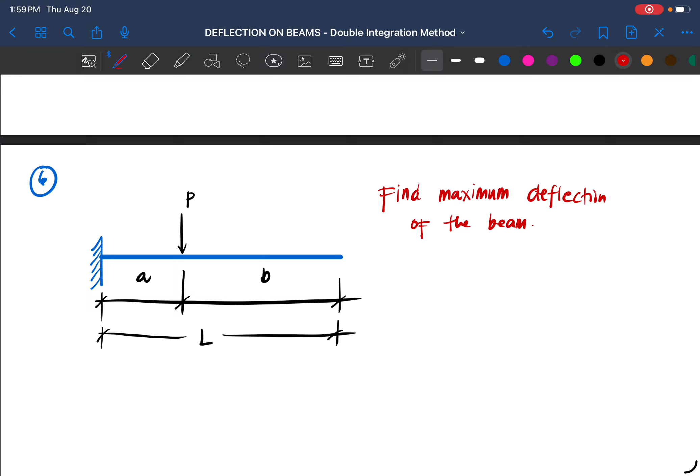Okay, for our next example, paano naman kapagka yung beam nyo ay cantilever na? Cantilever beam and at the same time wala kayong specific values for our load P. Ang distances nyo ay in terms of A and B and then L. Ang pinapahanap sa inyo ay yung maximum deflection of the beam.

Obviously, this is a cantilever beam, so ang magiging elastic curve nyo ay pag ganito. Mag-start kayo doon sa may fixed end support nyo, and then magkakaroon yan dito ng deflection sa dulo. Tandaan nyo na palagi kapag ang beam nyo ay cantilever, yung maximum deflection nyo ay laging nasa dulo. Ito yung inyong maximum deflection or Ymax. Okay, so pinapasolve sa atin yung maximum deflection in terms of these letters lang.

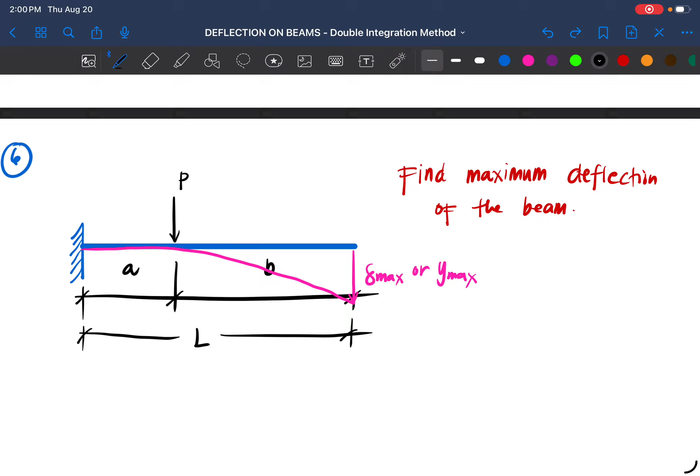Walang binigay na specific values for them. So let's try. Ganun pa rin, first, inanalyze natin yung beam nyo. Next, dinrawingan natin siya ng elastic curve. Ang third ay pwede natin actually kunin yung support dito.

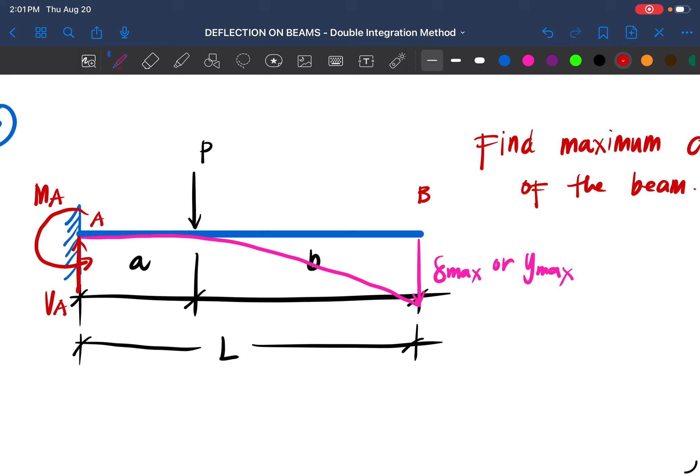Let's call this as your A and this is your B. Pwede natin sa totoo lang kunin yung VA dyan at saka yung moment A. Pwede natin kunin yan kasi this is a cantilever beam, so statically determinate yan.

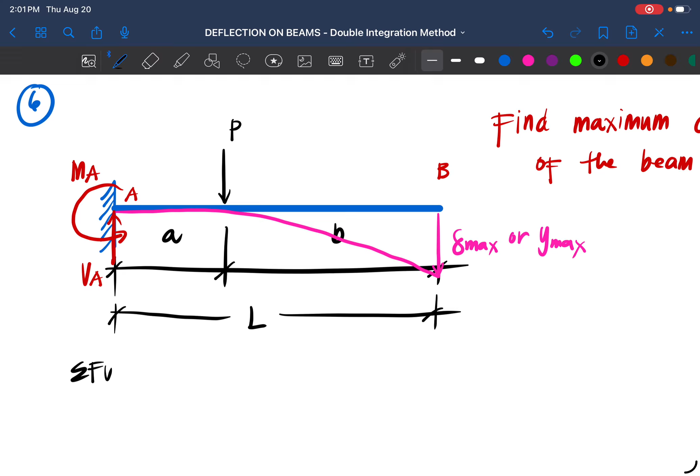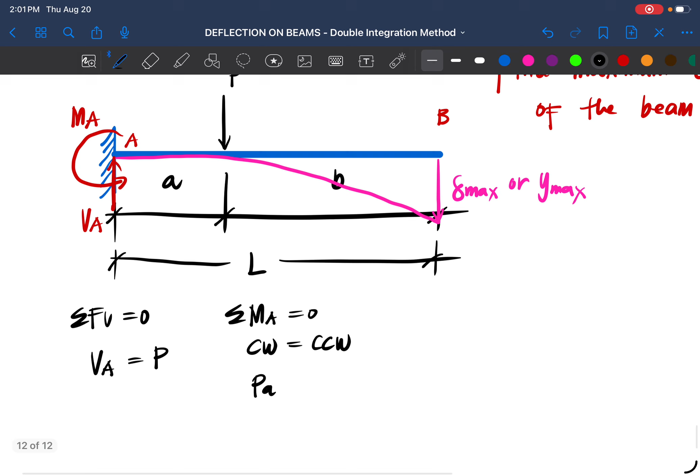So kapag nag-summation ng forces, vertical is equal to 0, so VA is equal to P. Yun na. And then, taking summation ng moment at A is equal to 0, clockwise equate that to counterclockwise moments. So that's going to be PA, P times A. Ano pa? Wala na, that is equal to MA. So therefore, MA is equal to PA, and then VA is equal to P. So ayan.

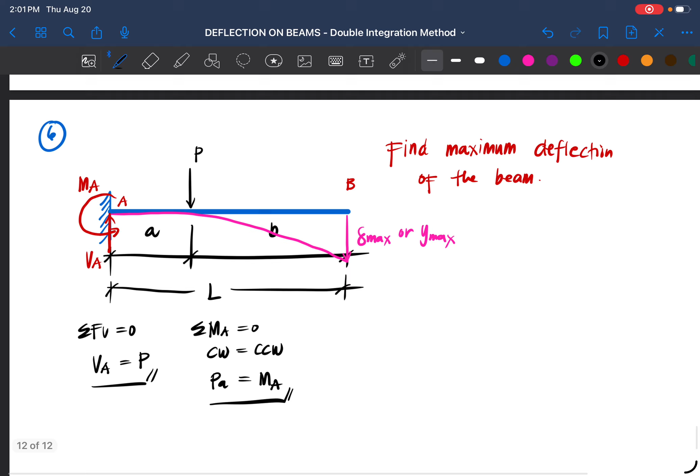Next, mag-draw tayo ng imaginary distance x. Okay, since kailangan natin i-include yung MA at saka yung PA na yan, yung VA at saka MA na yan, dito tayo mag-cut. Mag-draw ng imaginary distance x. Well, pwede rin naman sa kabila, pero pwede nyo i-try. Pero ako, dito ko siya idodrawingan ng imaginary distance x. Para ma-include yung MA at saka yung VA na yan.

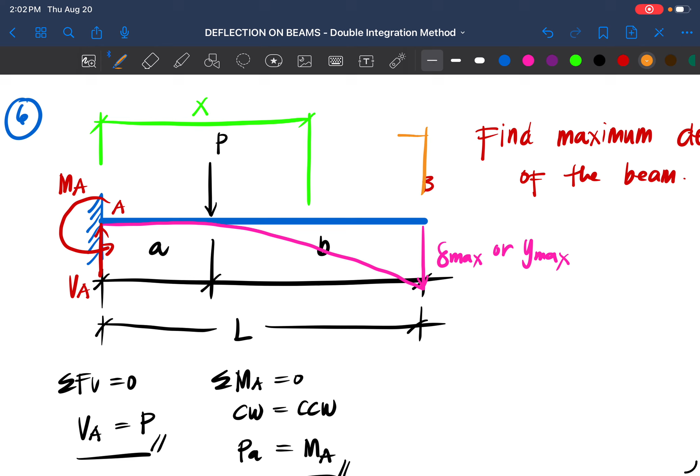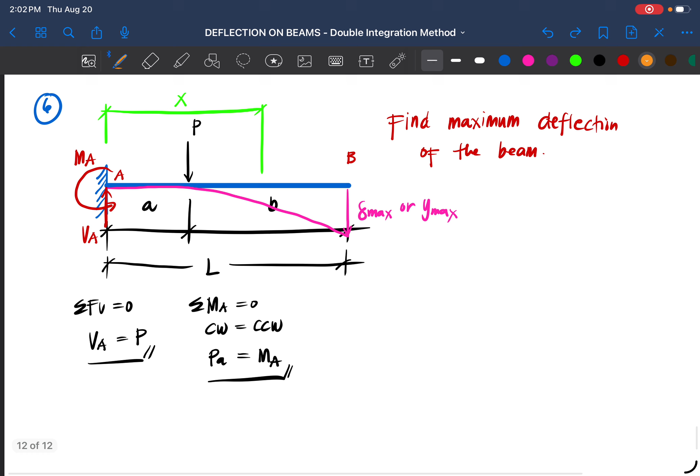Pero baka may magtanong, pwede dito? Yes, pwede yan. Ang mangyayari lang, yung magiging deflection nyo, instead of in terms of A, magiging in terms of B siya. Which, pwede naman. Pwede nyong i-try. Okay, na-analyze, na-drawingan ng elastic curve.

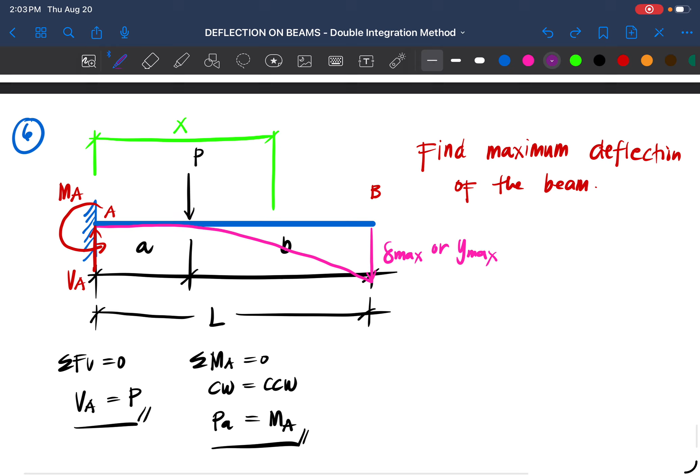Next, na-drawingan na natin siya ng imaginary distance x. This time, mag-solve na tayo or mag-moment na tayo. This is your mx or moment sa distance x. So, this will be EI y double prime is equal to mx.

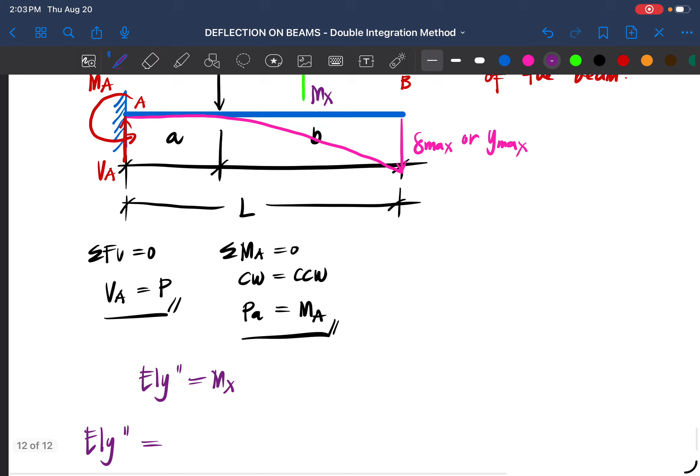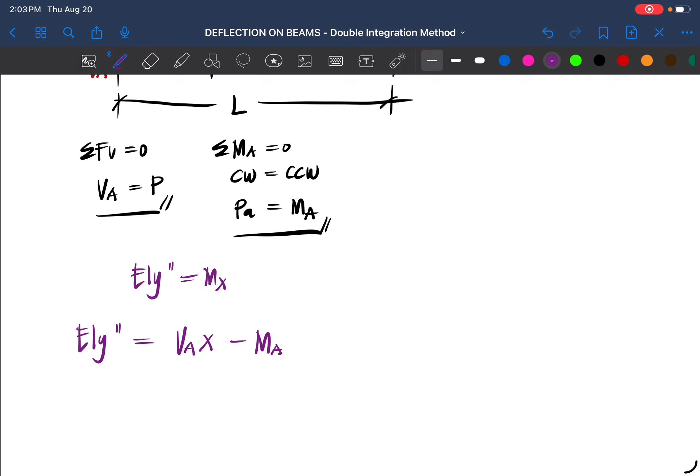This will now be EI y double prime is equal to, ano ba yung mx niya dyan? Upward forces minus downward forces. So yung upward VA yan is going to be V sub A X. Ano pa? Minus MA. Yung MA nyo, lagyan nyo siya ng X raised to 0. And then, ano pa? Yung P nyo, therefore, ang distance dito ay X minus A. Minus P times yung moment arm niya, that's X minus A. Okay, recheck natin, mabuti. That's V sub A X minus MA X raised to 0 minus P times quantity X minus A.

And then ito, yung V sub A nyo tsaka M sub A nyo, palitan nyo yan ng in terms of P. Ito yun. So ito, magiging P na lang to. And then ito, magiging PA. This will now be EI y double prime is equal to, this is PX minus PA x raised to 0 minus P times quantity x minus a. Ayun na.

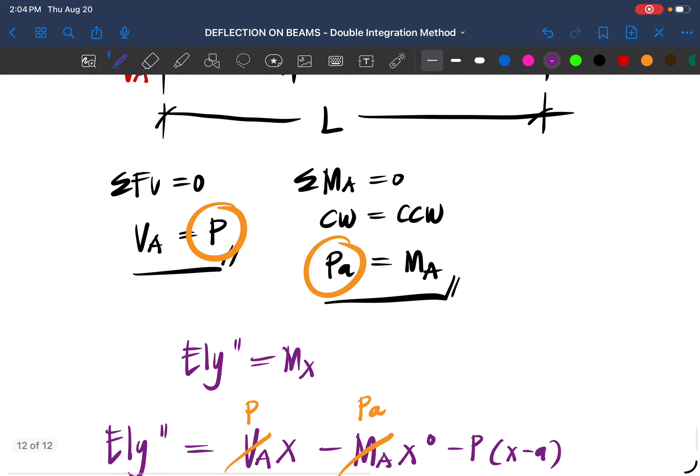Okay. Para check natin. M. Okay. Na-analyze, na-drawingan nyo yung elastic curve, na-drawingan nyo yung imaginary distance x, na-establish nyo yung moment equation nyo.

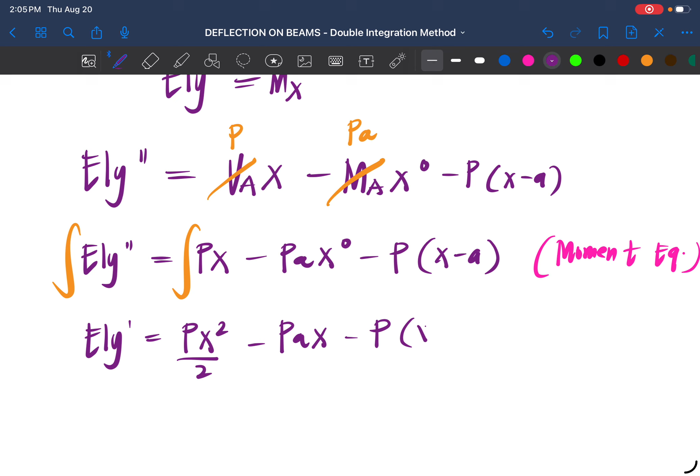This time, we can now integrate. This is your moment equation. Let's now integrate this, both sides. This will now be EI y prime is equal to PX squared over 2 minus PAX minus P times quantity X minus A squared over 2 plus C sub 1.

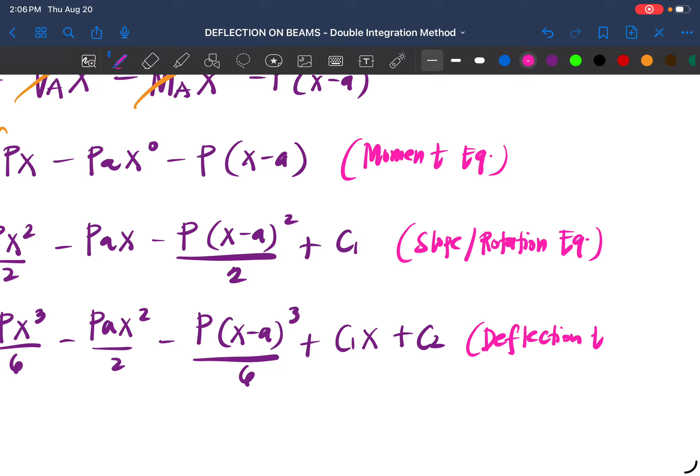Integrating once more, this will be EIY is equal to PX cubed over 6 minus PAX squared over 2 minus P times quantity X minus A cubed over 6 plus C sub 1 X plus C sub 2. We can now call this as your slope or rotation equation, and we can now call this as your deflection equation.

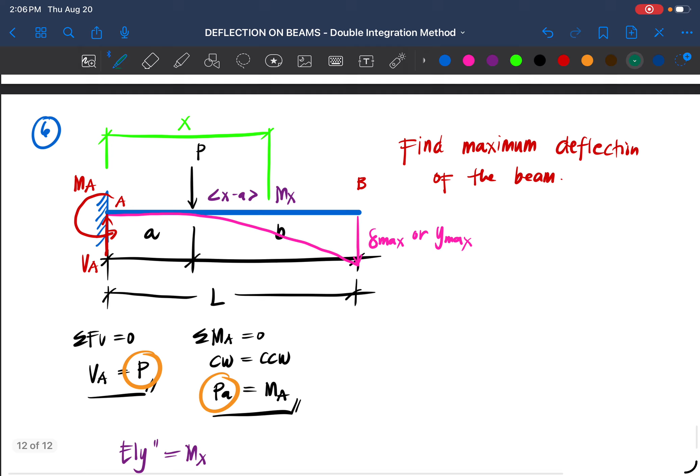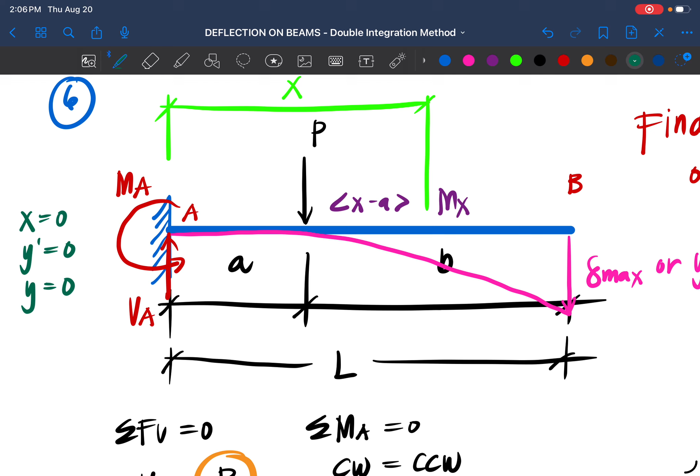Ayan. Okay, next, ano kayang next boundary conditions? Kapag ka binalikan niyo yung boundary conditions dyan, since dito tayo nag-start mag-draw ng imaginary distance x at x is equal to 0, walang rotation dyan kasi fixed yan. Wala ring deflection dyan. Y is also equal to 0. Yan na. Dyan lang. Wala naman tayong ibang support. So yan lang ang boundary condition nyo.

So, kunin natin to. Copy. Paste natin.

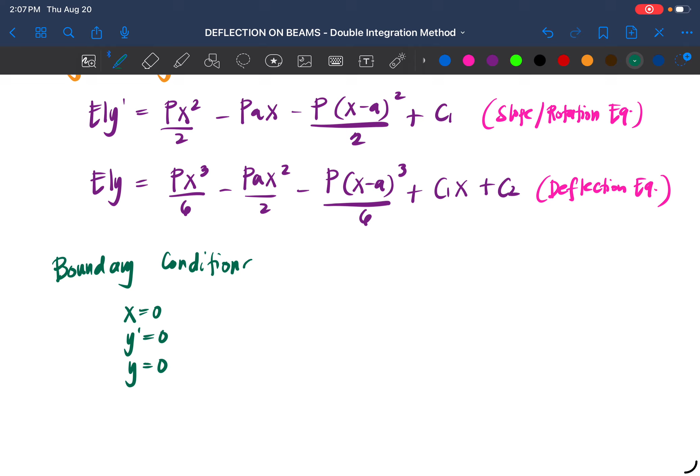Boundary conditions. So, pagka ginamit niyo yung boundary conditions na yan, since fix yan, mapapansin niyo, magsisiro lahat to.

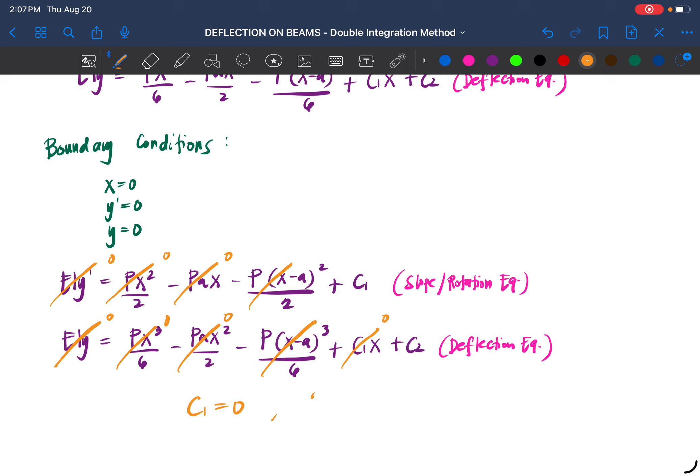So, this will be 0 to, 0 to, 0 to, eto disregard. Therefore, c sub 1 is equal to 0. Ito naman, 0 to, 0, 0, eto disregard, 0 din to.

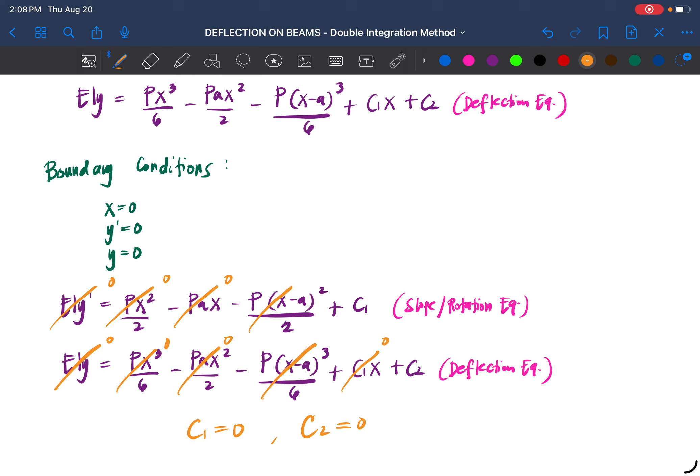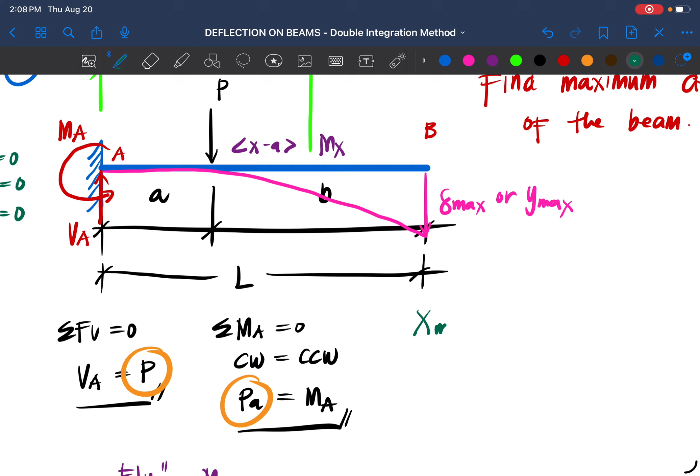Therefore, c sub 2 is also equal to 0. Ayun na. And then lastly, para kunin natin, since meron na kayong value ng c sub 1 tsaka c sub 2, pwede niyo nang kunin yung maximum deflection. Meron na kayong L. So, sulat natin dito, x max is equal to L at distance L. So, since kukunin natin yung maximum deflection, ang working equation natin dyan ay yung deflection equation.

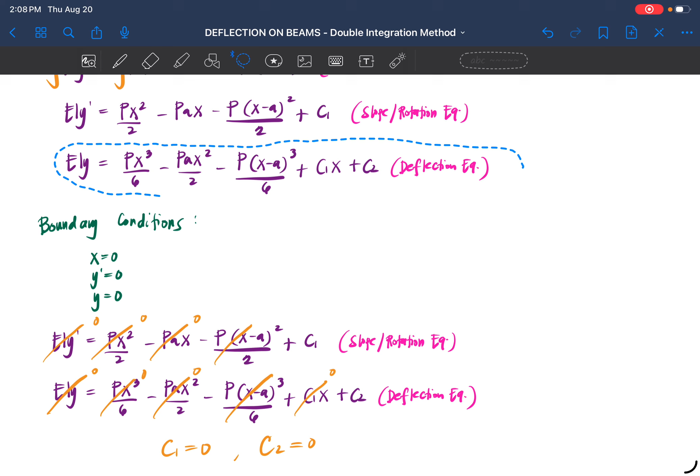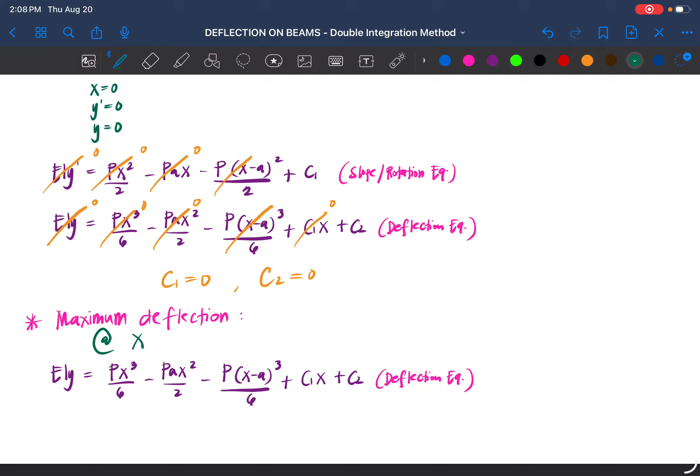Of course. So, i-note ko dito. Maximum deflection at x is equal to L. Okay, so palitan natin. Sige.

This will now be EI y max na to is equal to PL cube over 6 minus PA L squared over 2 minus P times quantity L minus A cube over 6 plus 0 plus 0.

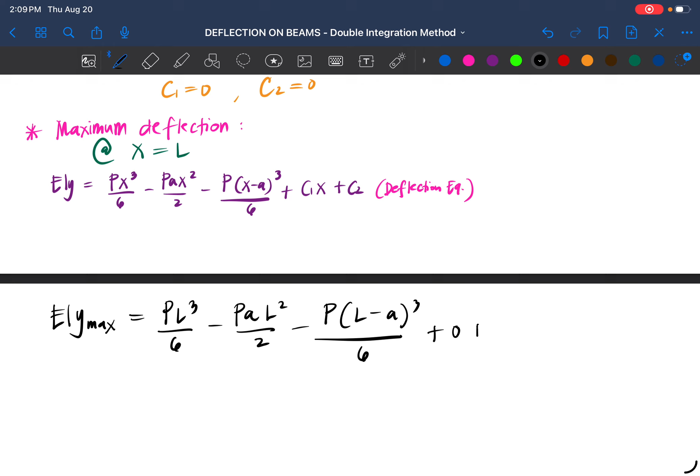Okay, eto, expand niyo to. Pwede niyong i-expand yan ng tatlo na ganito: L minus A times L minus A times L minus A. Or,

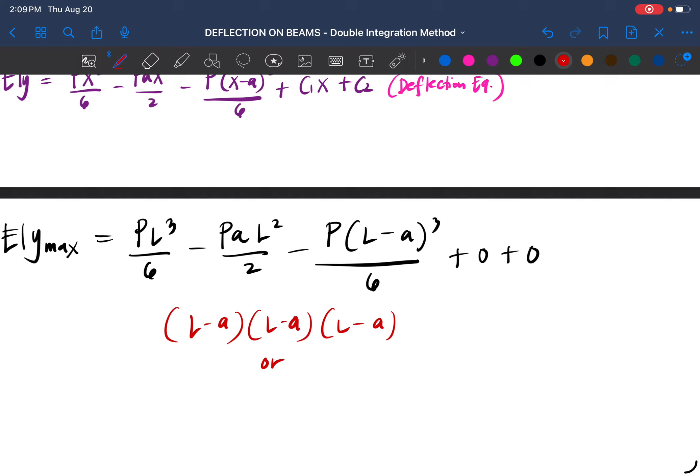tandaan niyo na yung cube of binomial natin, that is A minus B cube is equal to A cube, tapos dito 3a squared b, and then 3b squared a, and then b cubed. And then yung operations niyan, since negative tong operation niyo, alternating yan. So, kumbaga, ito, minus na siya dito, plus, and then minus.

In this case, your A is your L, and then yung B niyo ay yung A. Therefore, kaya ko na dito, L minus A cube will be equal to, this is L cube minus 3 L squared A plus 3 A squared L minus A cube. Ayan na.

Pero syempre, kapag nakalimutan niyo to cube of binomial, pwede yan i-expand ng ganyan. Mabilis lang din naman yan kasi tatlo lang naman. Okay. So, sige. Input niyo dun yan.

This will now be EI Y maximum is equal to PL cube over 6 minus PA L squared over 2 minus P over 6 times, ilagay niyo to, in-expand natin, L cube minus 3 L squared A plus 3 A squared L minus A cube.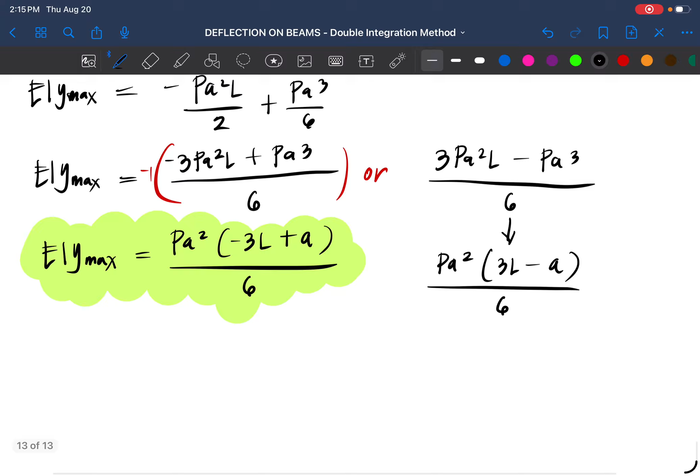Ayan. So, press lang yan. Ano lang, ginawa ko lang positive yung 3L. And then, so alisin ko pala muna to. Alisin ko na to. Yung EI, ibaba ko na. Ibaba ko na dun sa baba yung EI. This will be EI. And then dito, EI din.

Ayan, kahit ano yung maging final answer niyo dyan, okay lang. So that's it. This is your maximum deflection in terms of P, A, at saka L.

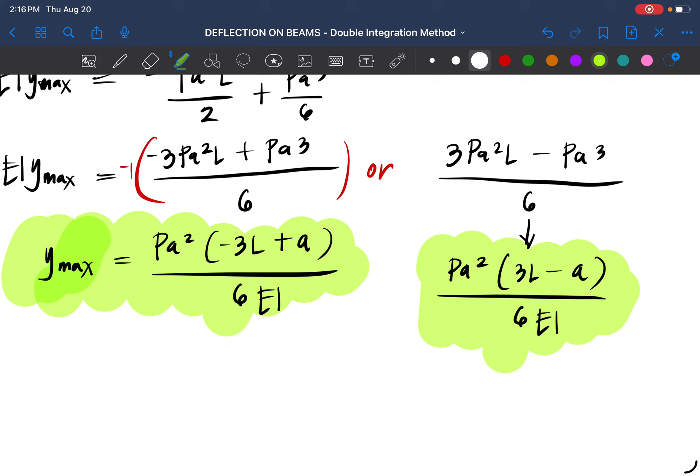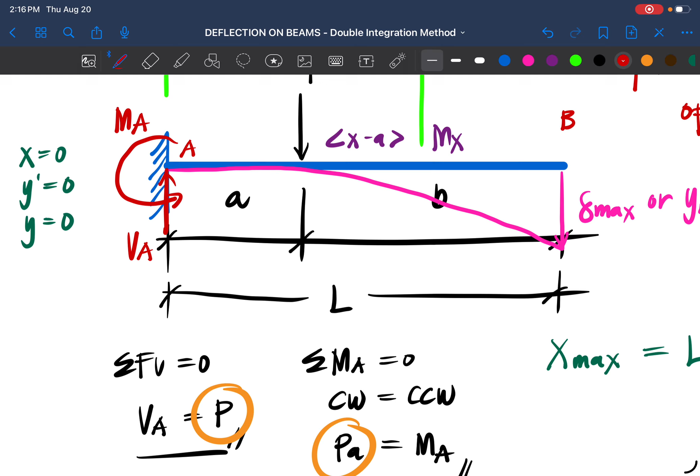Kung gusto niyo makuha yung maximum deflection in terms of B, wag niyo na, pwede kayo mag-cut do sa kabila or palitan niyo na lang yung L. Palitan niyo na lang yung value ng A. Di gawin niyo tong ano, in terms of, gawin niyo na lang tong pwede niyo tong gawing L minus B. Ayan. Pero this is your final answer.